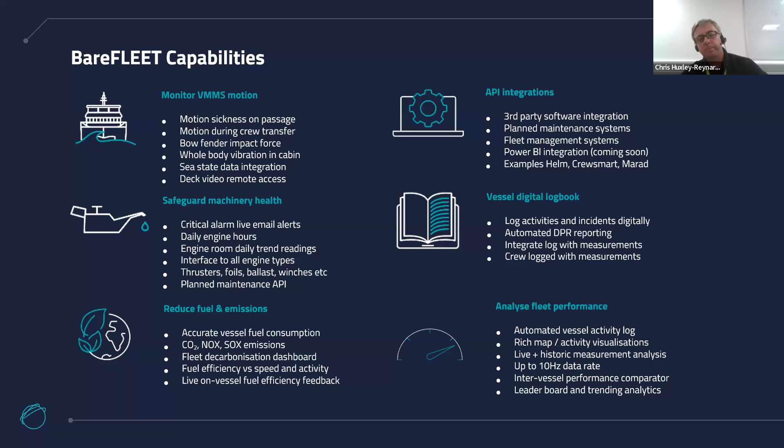So how does BareFLEET work?

At the heart of the system is a telematics data logger, which we install on every vessel. That data logger is connected to existing systems on the boat, as well as to some of our own sensors that we provide as part of the BareFLEET system.

So it reads data from propulsion engines, from gensets, from the ship GPS, from a motion sensor that we install if required by the customer, and also from other systems like gearboxes, hybrid drives, winches, or azimuth thrusters. We do tank level monitoring, fuel tank levels, and we also do machinery vibration monitoring.

So the scope and breadth of what BareFLEET can measure can be very broad, but in some cases it can also be very simple and restricted just to engine and position navigation monitoring.

An on-vessel fuel app provides real-time indication or feedback on all of the readings that the data logger gets to the crew. So they can see anything that the BareFLEET system can read, and they can visualize it in the wheelhouse in real time.

All of the measurements coming into the data logger are also logged and relayed to the cloud. They're logged typically every 1 to 5 seconds, and they're uploaded to the cloud in batches of data, refreshed every 4 to 5 minutes.

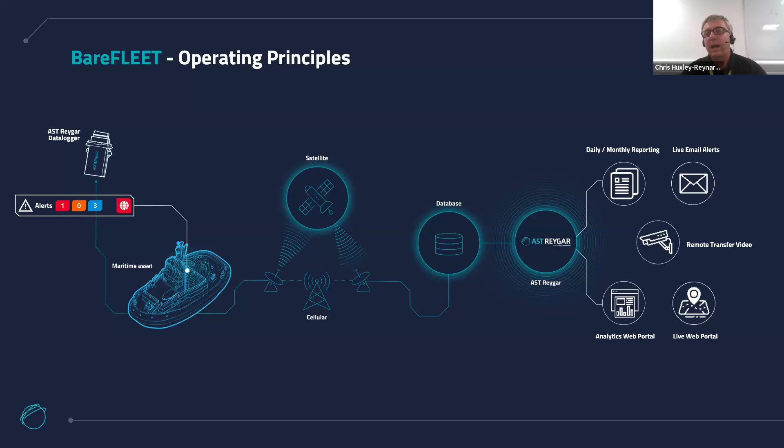Their fleet manager, Andy Osborne, was looking for a system that provided a very simple eye-in-the-sky picture of where all his vessels were, what they were doing, where they had been, and what they'd been doing over the past 24 hours, so he could simply keep track of who was where and which vessels were doing what.

He also wanted early warning of maintenance issues that would potentially cause a vessel to be taken out of service for maintenance, or cause an expensive repair. He wanted this warning as early as possible so he could plan and reschedule jobs across different vessels, taking a particular vessel out of service early to fix a problem, which would save cost and increase the availability of the whole fleet over time.

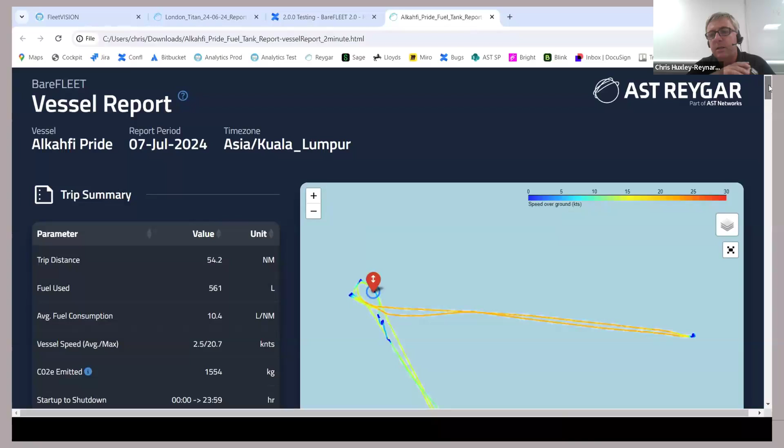So I'm going to start with a daily report. This is something which is emailed out to customers every day, appears in their inbox. You can also download it from the web portal, and it's a 24-hour summary of everything that the particular vessel has done in the last 24 hours.

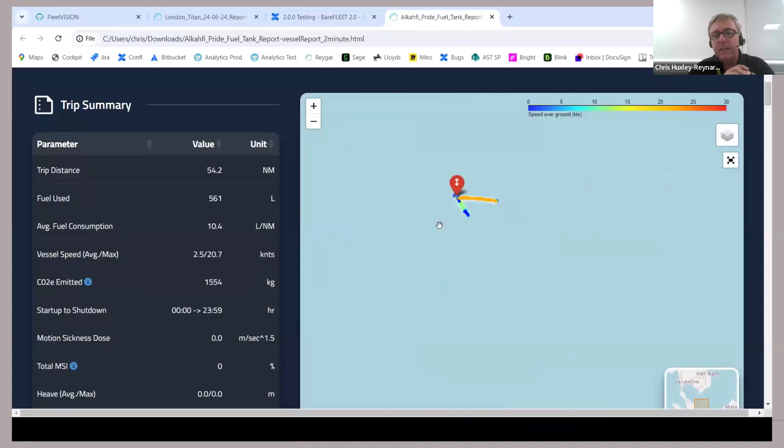This is a crew boat operating in Malaysia, and we can see there's an interactive map here provided within the daily report showing the track of the vessel and any notable activities—in this case, a crew transfer onto an offshore platform that the vessel's done.

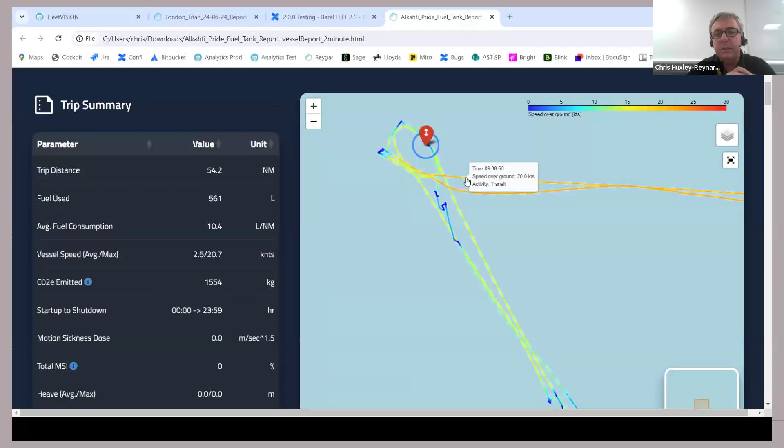You can see the track, direction, and speed, which is color-coded, and if you hover over the track, you can see the speed at any point. On the left-hand side is a summary for the 24-hour period being considered, with things like trip distance, fuel consumption, CO2 equivalent emissions, engine startup and shutdown time, and so on.

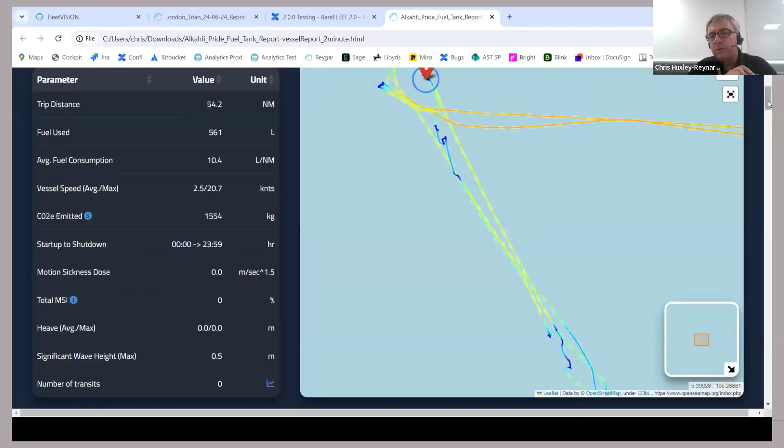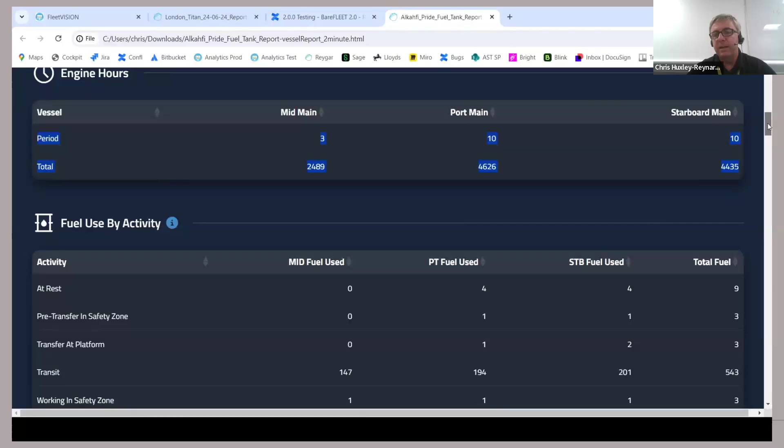As we scroll down the report, you'll see the engine hours and fuel consumption presented for each engine. The fuel consumption breakdown is broken down according to vessel activity: when the vessel's at rest, when it's in the safety zone, when it's doing transfers onto platforms or transfers of crew, and when it's in transit, where of course most of the fuel is consumed.

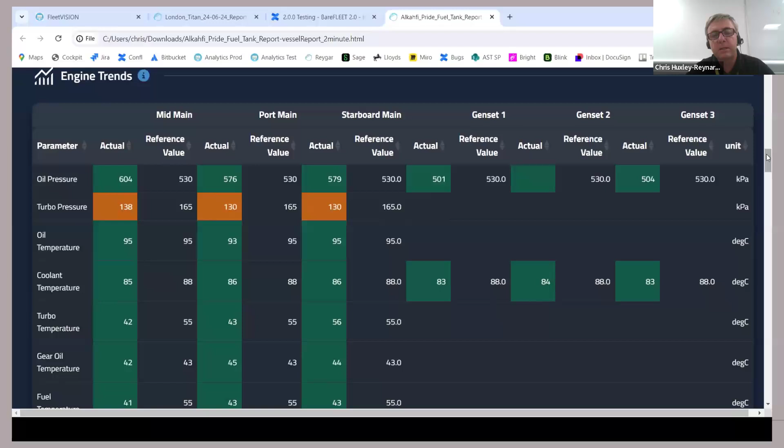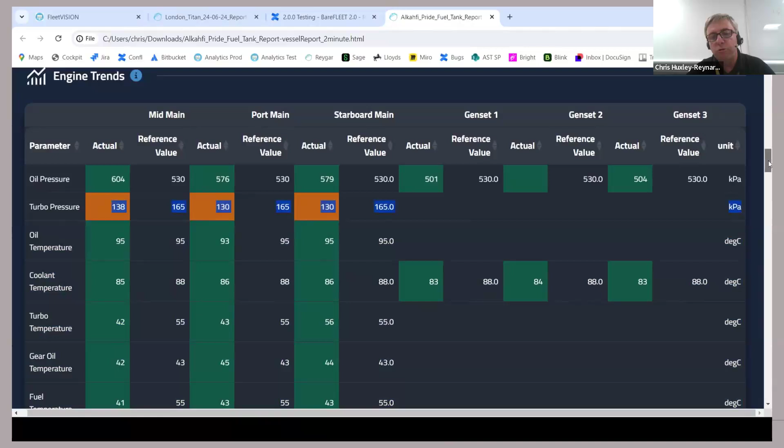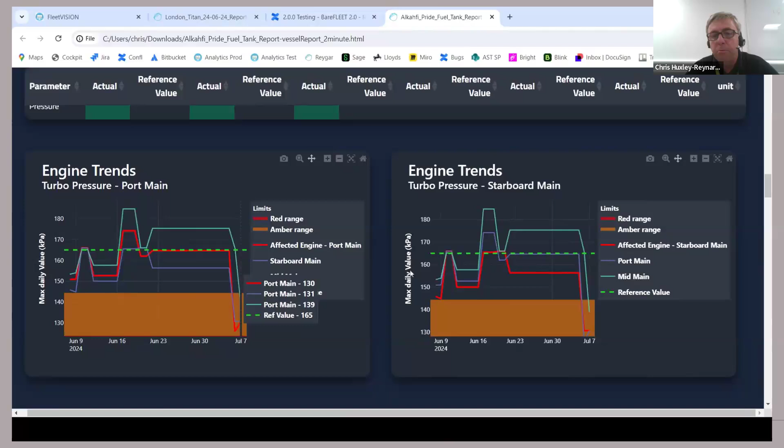The alarms and engine trends are included in the daily report. Alarms would normally be critical engine or machinery alarms. The trends would be measurements of pressure and temperature according to reference expected values for the particular machinery, and where there's something out of the ordinary, that's highlighted in orange or red. A little 7-day trend graph is provided for each abnormal measured trend so the customer can see if this is something that's just occurred in the last 24 hours, or something that's been trending at a high temperature or low pressure for the last 7 days, which might influence the course of action they take.

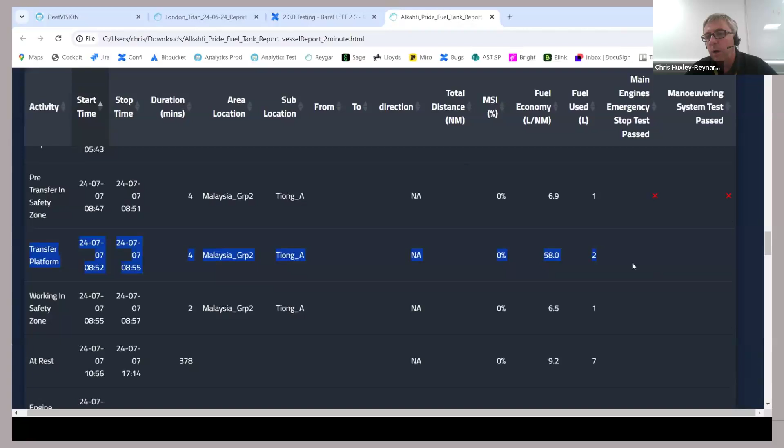The vessel log provides a summary of all of the vessel activities that have taken place in the last 24 hours. In this case, this is transfer of technicians onto a platform, and it gives the fuel efficiency and fuel consumption for each activity, and of course the activity timing.

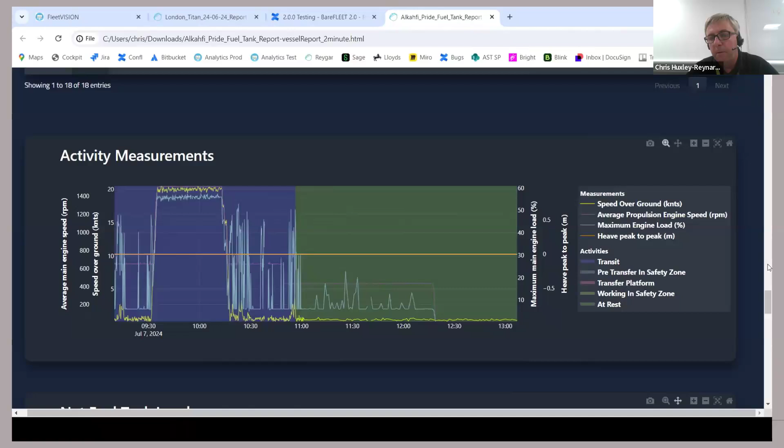All of the measurements, whether vessel speed, engine load, or vessel motion, are presented in a summary activity graph, and the background color to that graph shows the type of activity the vessel was doing at a particular time. So background blue color is when the vessel is maneuvering around, and background green color is when the vessel is at rest.

For this particular customer, they are interested in monitoring fuel tank levels in order to identify both bunkering events and also potentially fuel theft events. So they can see how the fuel tank levels vary over time in correlation with the measurements of fuel consumption on the individual engines. From this, they can verify that the fuel being consumed by the engines tallies with what's being indicated from the tanks, and they can also verify the bunkering of fuel.

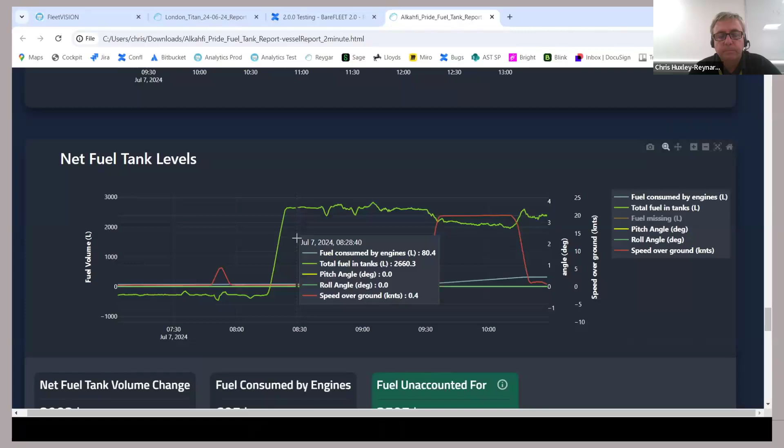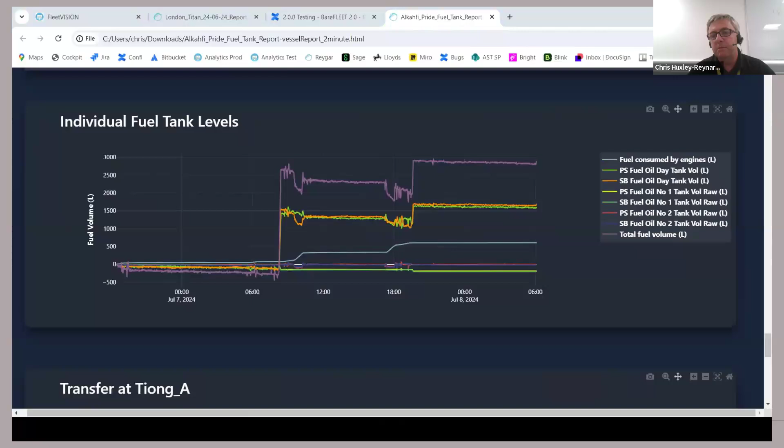Hopefully you see the daily report is a succinct way of summarizing vessel activity and the measurement parameters and KPIs likely to be of interest to a customer on a day-to-day basis. These reports can be customized to include or exclude particular bits of information depending on the intended audience seeing this report. Next, I'm going to show you the live web portal.

So here we have a fleet of 4 tugboat vessels operating in the US, and customers can log on to the portal and see the location and activity of those vessels in real time via this portal.

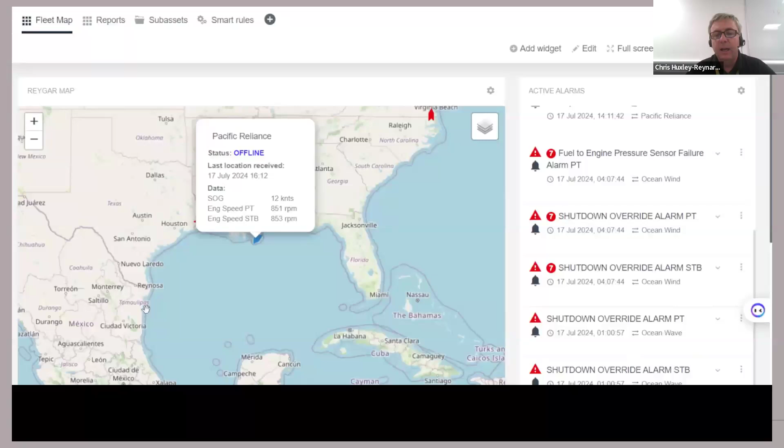This particular vessel is currently offline, but at its last reported data it was doing 12 knots, engine speed of 850 RPM. On the right-hand side we can see all of the active alarms for all of the vessels in the fleet, and we can select a particular vessel and drill down into the next level of detail, and that's what we're doing here.

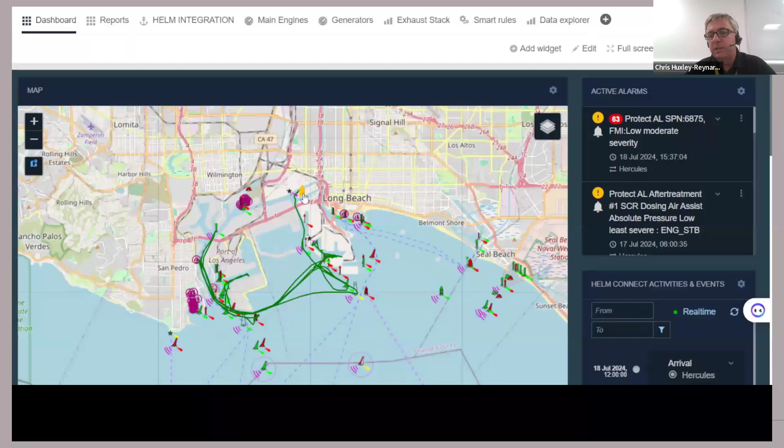So we can see here the last 24-hour track for this particular vessel, which is based at Long Beach. On the right-hand side there, we see the active alarms that are pertinent just to that vessel.

Below that, we can see the activities that the vessel has conducted in the last 24-hour period. In this particular case, the system BareFLEET is integrated with Helm Connect, so those activities come from the Helm system. You can see their arrivals, mobilizations, and demobilizations as recorded within Helm Connect being shown in the BareFLEET system.

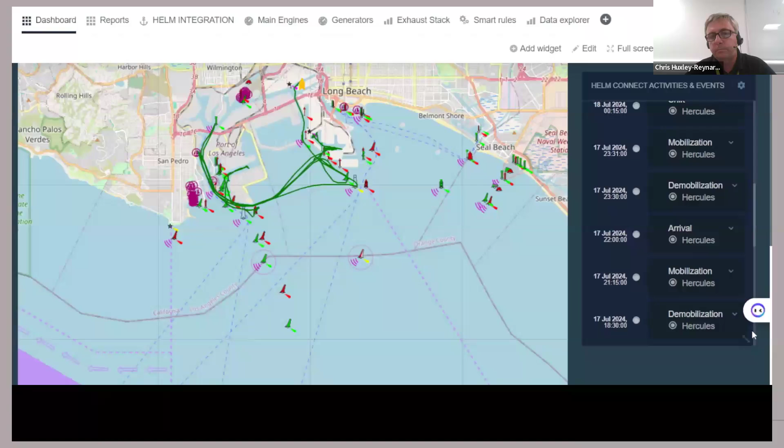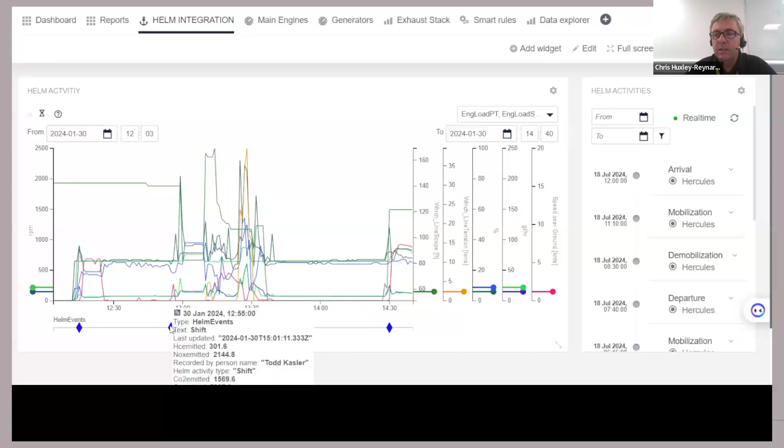Beneath the measurement graphs, you can see those little blue diamonds indicating activities that are logged by the crew within the digital logbook system they're using, which in this case is the Helm Connect system. So they can see the timing of those recorded activities with respect to the measurements coming back from the sensors.

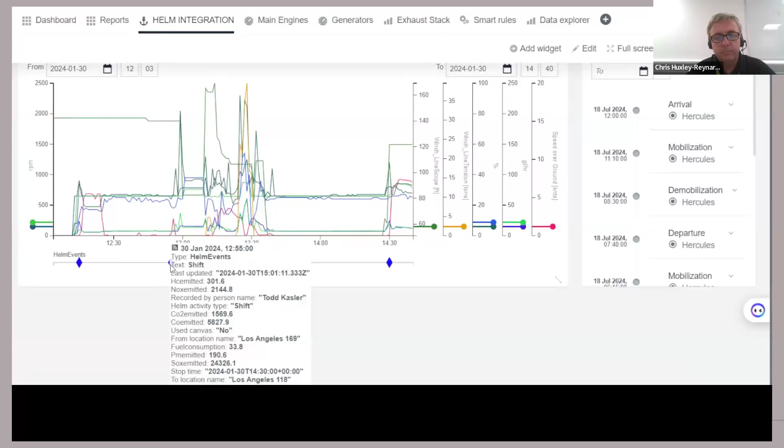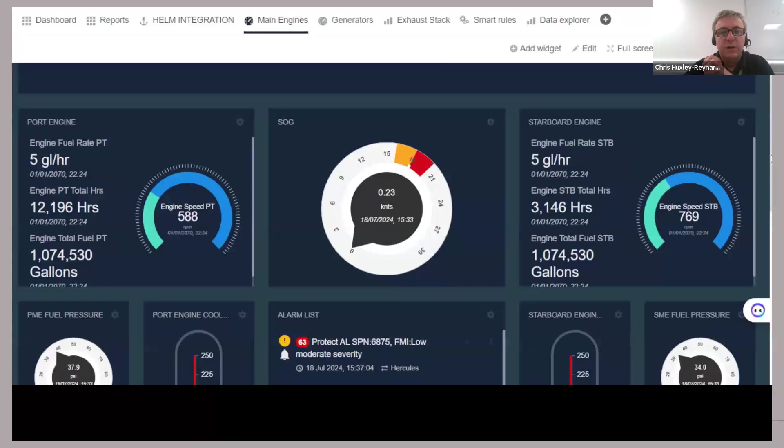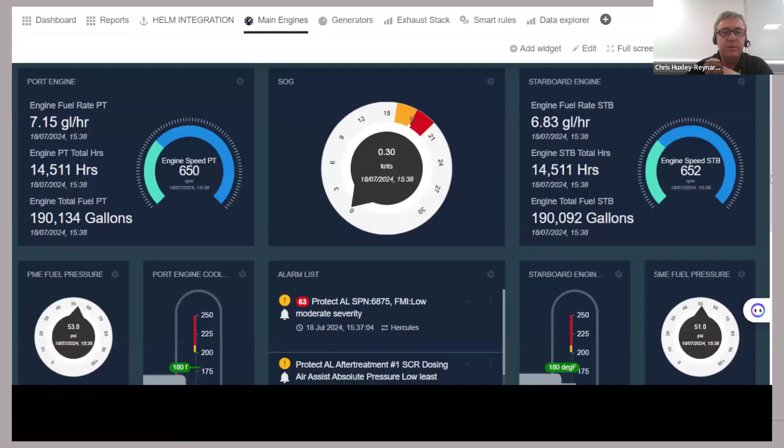Sometimes a customer may want to drill down. Customers have an interest to sometimes see a live dashboard, basically like being on the bridge of the vessel, seeing live readings of speed over ground, engine speed, temperature, pressure, or engine alarms. The remote live dashboard allows customers to see that, updating every few minutes, or you can put it in live mode and it will update every few seconds, kind of like being on the bridge of the vessel.

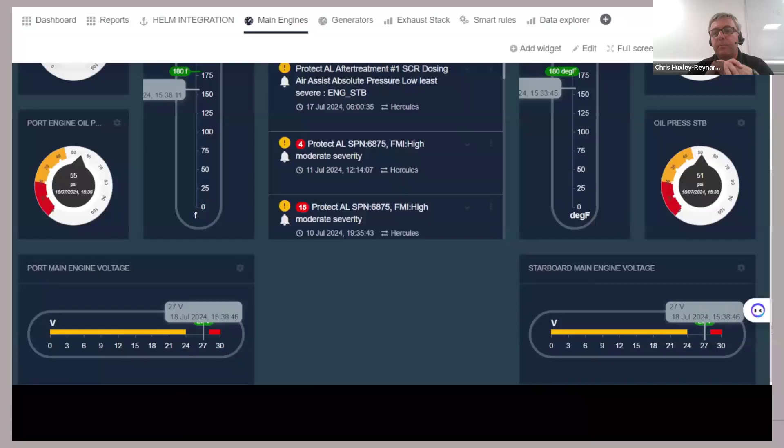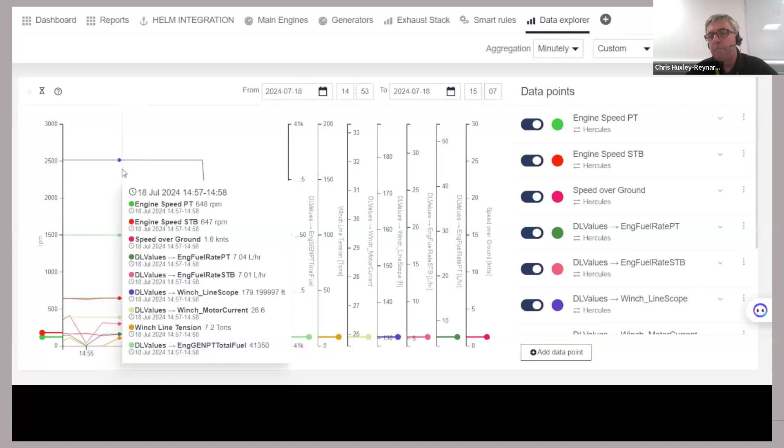Sometimes a customer will have a requirement to drill right down into detail of selected, customized measurements for any period of time. The BareFLEET system allows them to do that, going back up to the last 6 months worth of data. They can drill right down into detailed second by second or 5 second by 5 second measurements, and select any measurement parameters that BareFLEET is gathering, zooming in on those measurements.

Perhaps there's a point in time where there was a machinery failure, or an impact with another vessel or an offshore structure, or some other incident, and the customer wants to zoom into the detailed measurements and understand exactly what happened. The live web portal allows them to do that.

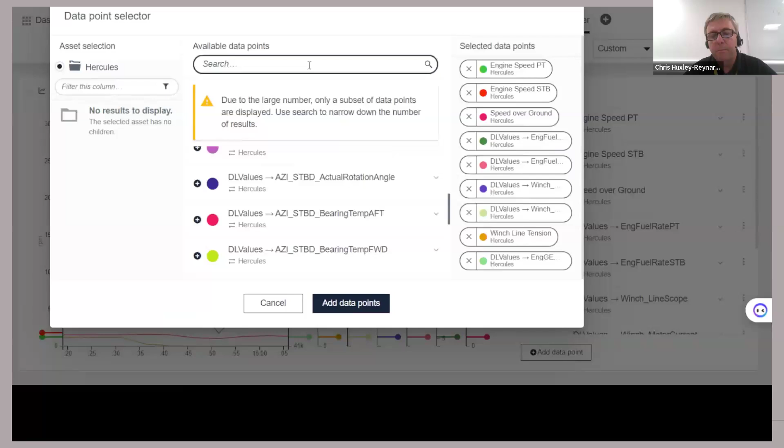There's a big selection of measurements that the customer can choose from. Depending on the scope of monitoring for a particular BareFLEET installation on this vessel, they're monitoring thrusters, engines, gensets, and winches, as well as ship position and weather information. So the scope of monitoring can be quite extensive, and there are simple tools here to find the parameters you're interested in and select those for display within the Data Explorer.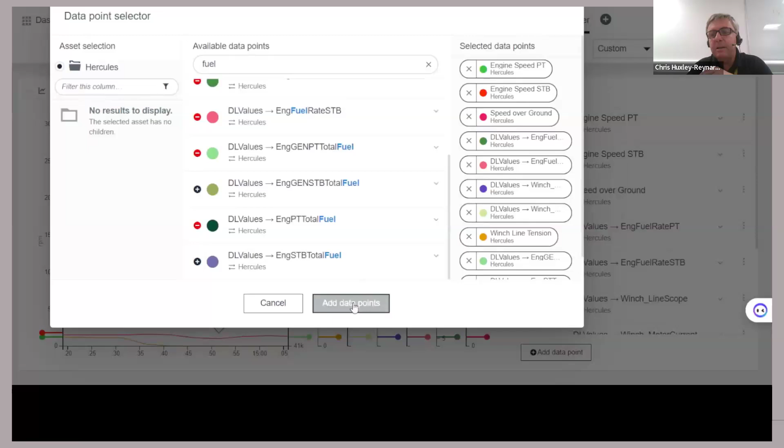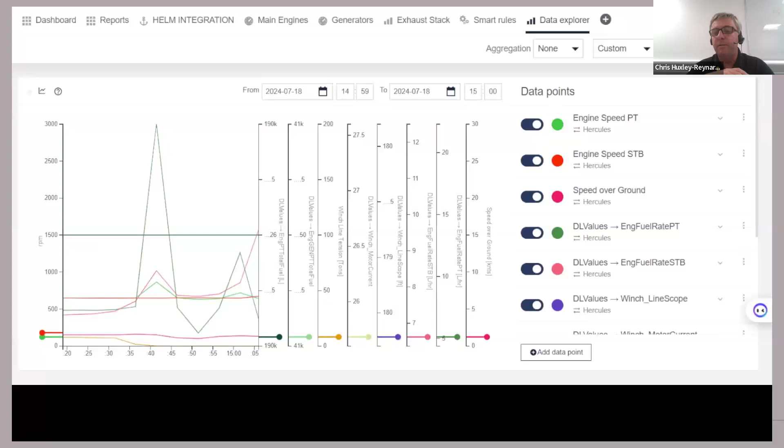So this detailed view of per vessel measurements is one use for BareFLEET, but often customers want to look at the big picture. They want to compare the performance of vessels in their fleet over long periods of time. They're not interested in the minutiae of second by second measurements, but in comparing fuel consumption, motion sickness performance, or crew transfer score for CTV vessels between their fleet over long periods of time. The Fleet Vision tool, which I'm showing you here, allows them to do that.

Fleet Vision presents fleet data for any selected period of time for any subset of vessels in a fleet. Here we have a customer operating 12 or so crew transfer vessels. On the map, we can see the individual passages that all of their vessels are doing between the harbour and the worksite over the selected period of the last 8 days. The fuel efficiency in litres per nautical mile for all of those vessels is shown in the bottom left, allowing a direct comparison between vessel efficiency. The cumulative fuel consumption for all of those vessels is shown on the bottom right.

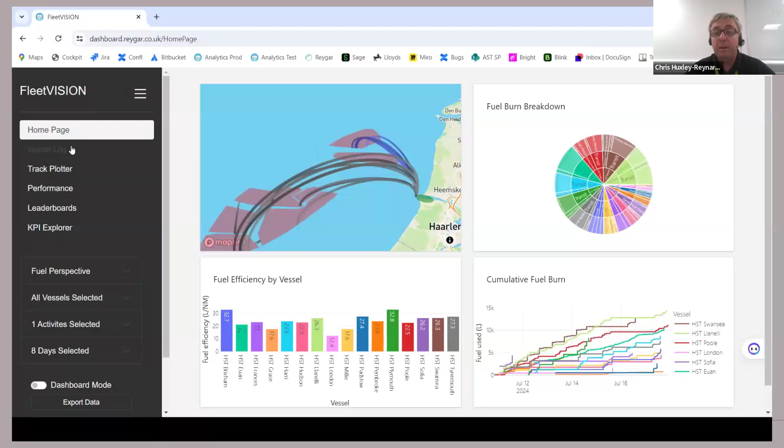So here is a simple tool to look at fleet performance data, and you can filter that data by activity. You might just be interested in transits, or periods of time when the vessel is at rest, and you can filter those activities in Fleet Vision.

We're looking at the vessel log page here. This is a log of every single activity that all of the vessels in a customer's fleet have undertaken over the chosen period of time. We can see information such as the fuel consumed per activity, the fuel economy per activity, the trip distance, CO2 emissions, NOx emissions, and motion sickness measurements on a per activity basis.

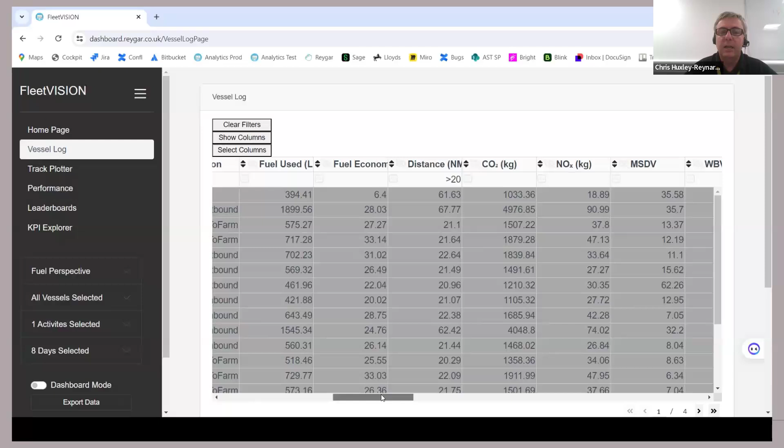And they can be filtered. So we might be interested in activities where the distance traveled was more than 20 nautical miles, and then further interested in those activities where the fuel economy achieved was, let's say, greater than 25 liters per nautical mile. The log page allows a customer to filter activities in that way, and they can then be exported so that they can present them in a report or do further analysis on them.

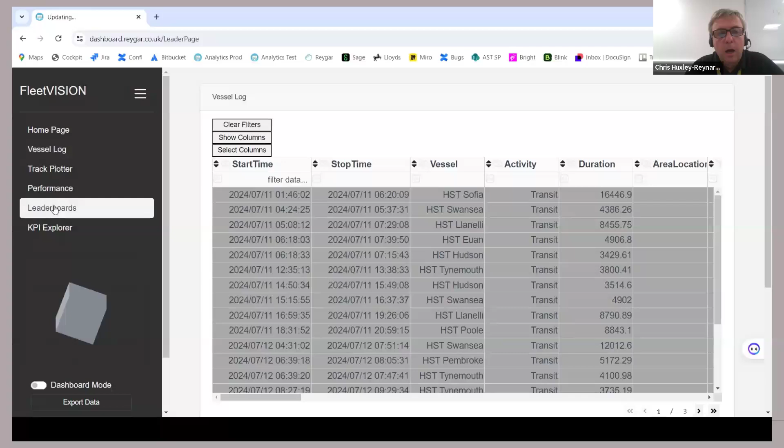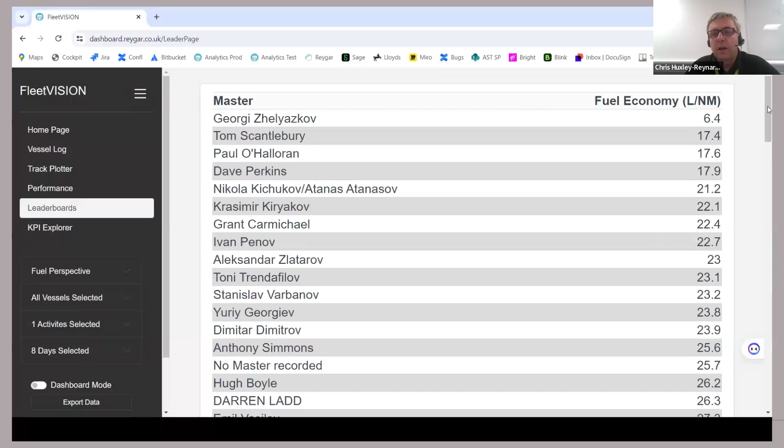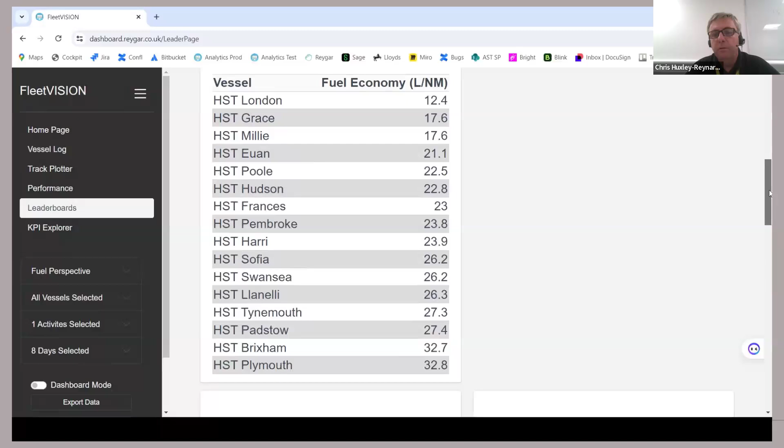Customers are interested in leaderboards as a way to compare the performance of the vessels as well as their crew. This one looks at fuel economy comparison for all of the masters and skippers that work for a particular fleet operator, as well as the fuel economy for the vessels which they skip, over a chosen period of time, which happens to be the last week. You can select any period of time, even several years if you want.

You can also filter those fuel economy readings by vessel activity. Maybe you're interested in just transits, or maybe when the vessel was working at low speed. You can do that sort of filtering using the Fleet Vision tool. This is a great way to understand how different vessels in your fleet are performing, and even make decisions about future procurement choices for specifying new vessels, once you have a really good understanding of how your current fleet operates and what their duty cycle looks like.

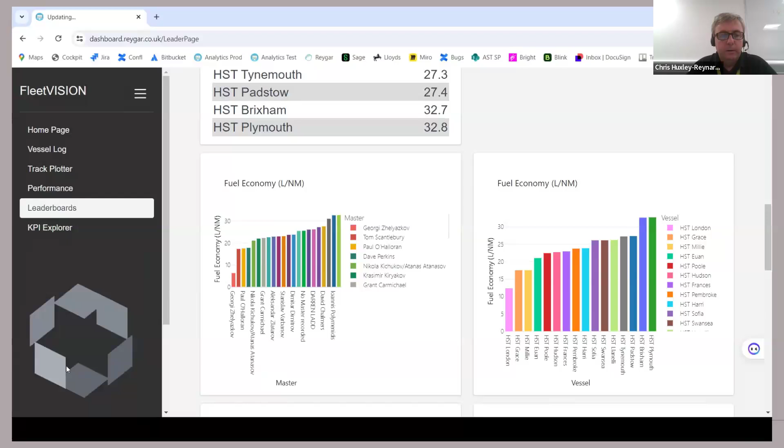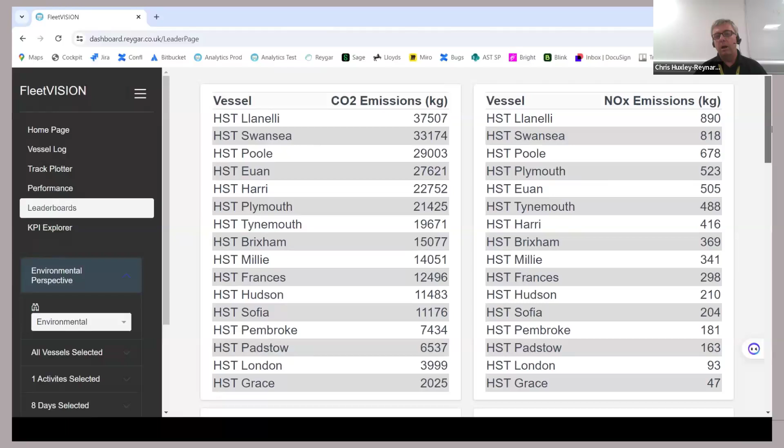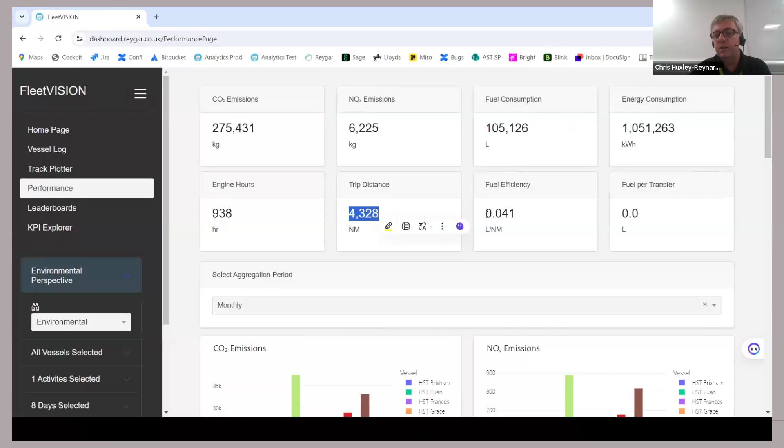Customers are also interested in tracking emissions, and they can track the CO2, NOx, and SOx emissions of their fleet over long periods of time, making similar comparisons between vessels. There's a nice visualization that provides a dashboard summary of consumption and emissions for the total fleet, or a subset of the fleet, over a chosen period of time, which you can see here. The graphs below show how those emissions and consumption measurements trend over time - weekly, monthly, quarterly, or even annual trends across vessels in your fleet.

Fuel economy is, of course, something that's of interest to a lot of vessel operators. There are tools within FleetVISION that allow you to visualize how the fuel efficiency - a measurement of liters consumed per nautical mile traveled over the ground - varies with boat speed, and how that compares between different vessels in your fleet. It's what we call the fuel speed curve, which is what I'm showing on the top left-hand side here.

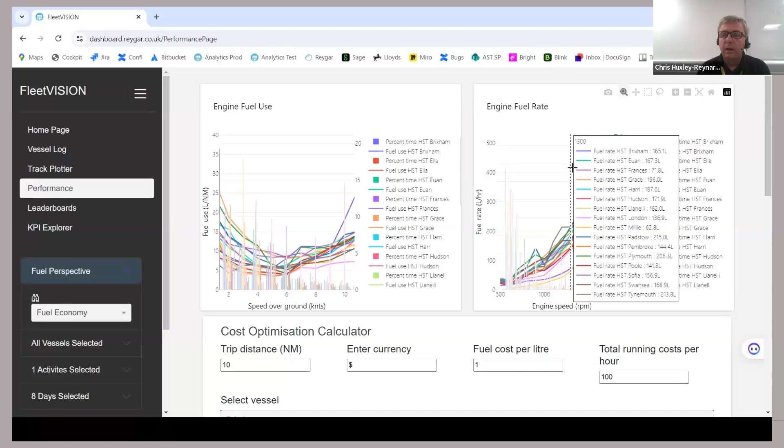By combining that information with information about the hourly running costs of a vessel and the cost of fuel - dollars per hour, dollars per liter or dollars per gallon - it's possible to visualize how the running cost of a vessel changes when you combine the hourly running cost and the fuel cost, depending on the speed you choose to steam on passage. This helps customers make operational decisions about efficient speeds to transit on long passages that weigh up the cost of fuel with the running cost of the vessel.

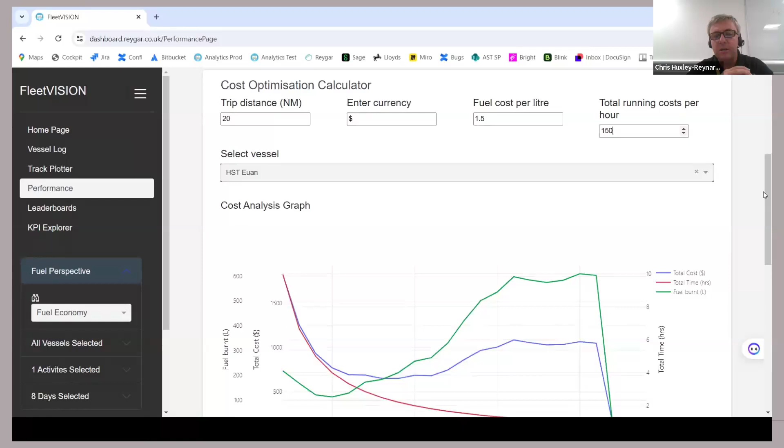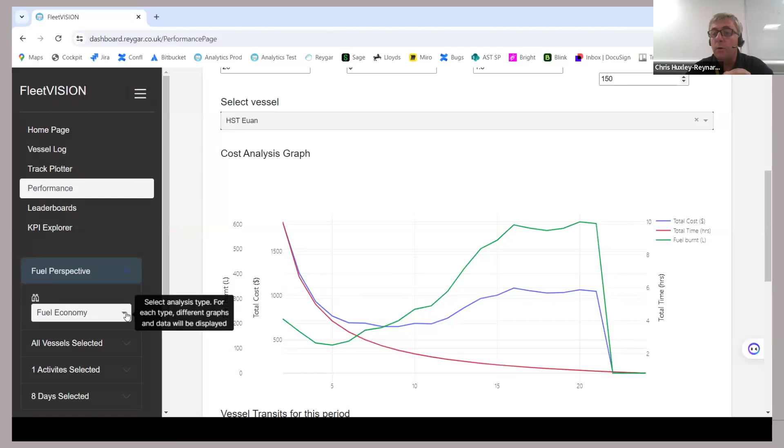We can see the blue line here in this particular example for the particular vessel being considered, HST Euan. Based on the measurement data of fuel efficiency performance for this vessel, this is telling you that there is an optimum speed of about 8 knots for the parameters we've chosen, which leads to the lowest overall running cost for that boat.

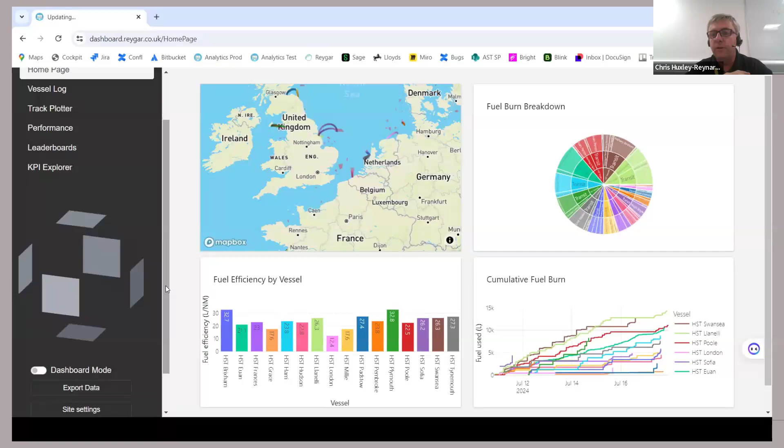There are customers who use FleetVISION not just to compare the fuel and emissions performance of their vessels, but also to look at the ride comfort and transfer stability - by which I mean motion stability - of their vessel, and compare those parameters across their fleet. This is particularly of interest for pilot vessel operators and offshore wind crew transfer vessel operators, where motion sickness measurements and deck heave motion stability measurements are an important metric in determining how good a job they're doing delivering technicians or passengers on and off turbines or other vessels.

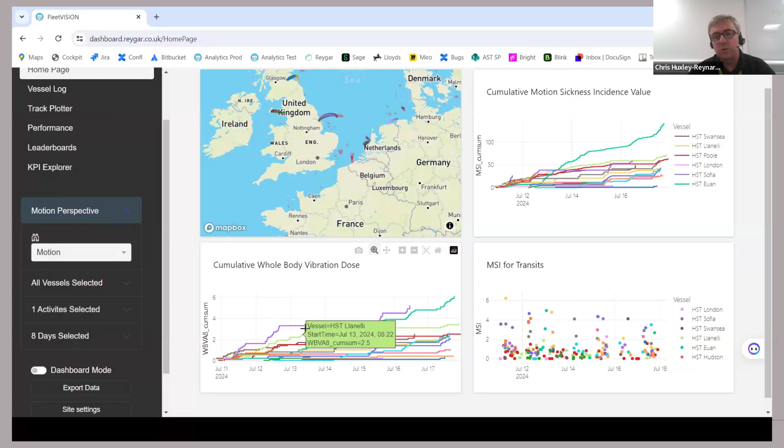Okay, so hopefully that's given you a picture of what the BareFLEET toolset looks like for a customer.

I just wanted to finish by summarizing some of the main benefits of the BareFLEET system for customers. It's a great tool to provide an eye in the sky on all aspects of vessel and fleet operations - where vessels are, how fast they're going, what activities they've been doing. For the shore team, it gives them a very clear visualization of that information, both in real time and historically.

As a tool to drive fuel reductions, BareFLEET has great functionality, both for measuring fuel consumption and telling you where you're at right now, but also driving fuel reduction efficiencies, in particular through use of the on-vessel fuel app, which provides live indication of fuel efficiency to crews and sets them achievable targets for the particular vessel they're operating.

Environmental and ESG reporting is a great feature of BareFLEET, where customers are interested to evidence their ESG credentials, to monitor CO2 equivalent and NOx and SOx emissions, and to drive down those emissions. BareFLEET provides them with the data and the wherewithal to achieve those emission reductions through their operational decision making.